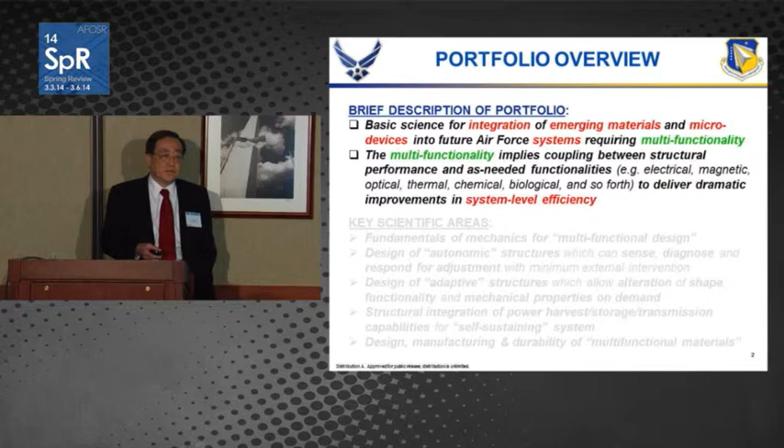The goal of the program remains the same: we are trying to promote basic research for integration of emerging materials and micro devices into future Air Force systems requiring multifunctionality. Here I'm using narrow definitions of multifunctionality coined by the system community, starting with battery structure combinations for UAVs, load-bearing antennas for aircraft, and reconfigurable space mirrors.

So they are rather narrow, and this narrow definition of multifunctionality implies coupling between structural performance and as-needed functionality to deliver dramatic improvement in system efficiency. This as-needed functionality can be electrical, magnetic, optical, thermal, chemical, biological. It's anything basically dictated by system design requirements.

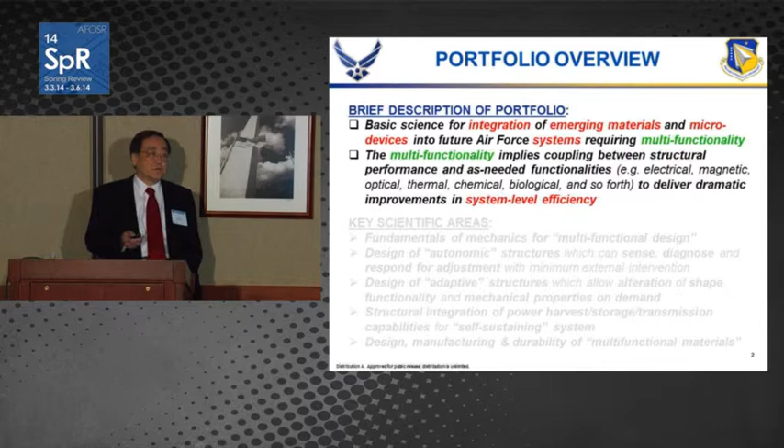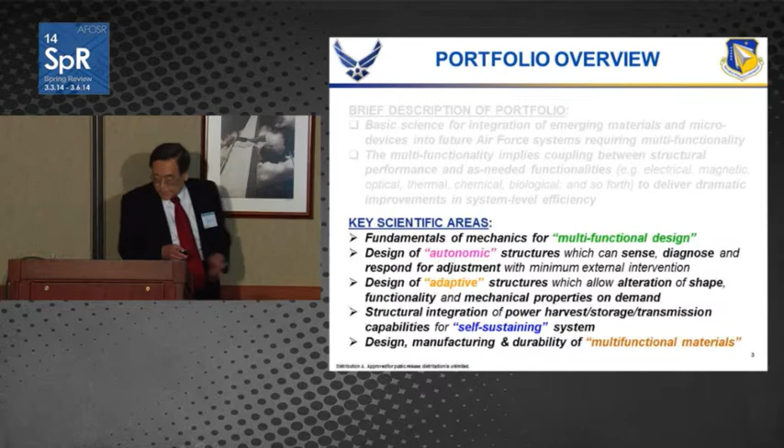And with these narrow definitions of multifunctionality, we have to deal with a really diverse range of topics. At the same time, we have to come up with a visionary context which can be used as a focus of the program. So that's how we handled it. Among several visionary contexts, we tried these three areas. These three areas are basically the main focus areas.

Autonomic systems which can sense, diagnose, and respond for adjustment with minimum external intervention. Then adaptive structures which allow alteration of shape, functionality, and mechanical properties on demand. On demand, that's very important. And finally, structural integration of power harvesting, storage, and transmission capability for self-sustaining systems.

So in fact, these three areas are somewhat overlapping. Some adaptive structures can have an autonomic feature, and in both areas many of them require power constantly, so it has to be a self-sustaining system.

Now, aside from these focus areas, we also have to handle fundamentals of mechanics for multifunctional design. In other words, we cannot rely on traditional mechanics any longer. It has got to be combinations of continuum mechanics with electromagnetic wave theory, and even molecular dynamics.

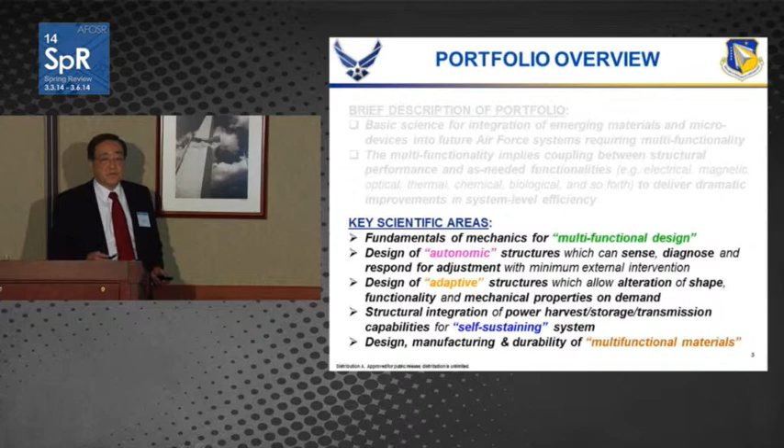And finally, when I started this whole venture about 12 years ago, there were not many multifunctional structures available. But in a 12-year time frame, a lot of multifunctional structures were established. So now we are starting to worry about manufacturing and durability problems, and also design interfaces, because the new features we're adding to multifunctional structures shouldn't become defects.

Before moving on, let me quickly point out some key facts about autonomic and adaptive structures. The autonomic system concept came from biology. Our biological systems have wonderful unique functions as a result of millions of years of evolution. The best example is our brain, our nerve system, but we are also interested in self-generating as well as self-regulating functions, because temperature maintenance and prevention of incipient damage is very, very important.

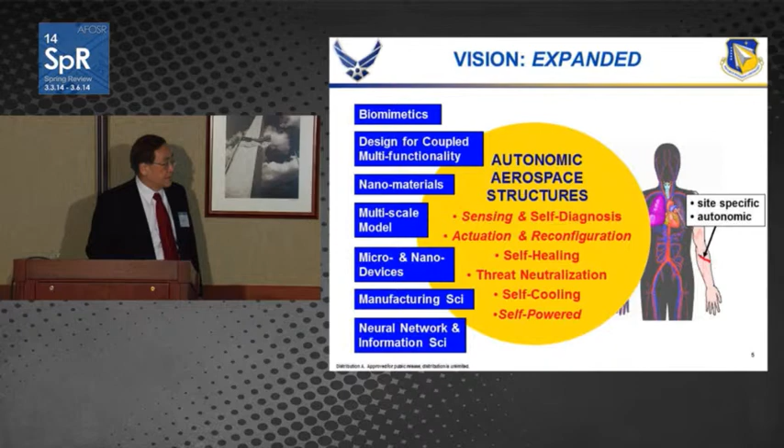Since 2002, this has been the main mission of this portfolio. We have been trying to come up with a multifunctional design of autonomic aerospace structures with bio-inspired functions: sensing, self-diagnosis, actuation and reconfiguration, self-healing, threat neutralization, self-cooling and thermal management, and finally self-powered system aspects. We made a lot of progress and breakthroughs, except threat neutralization. I still have to work on it.

And adaptive structures. Adaptive structures have a more engineering-side origin. The most well-known example is, of course, the morphing wing aircraft. You probably heard of it. In 2005, DARPA succeeded in creating it, and this morphing wing aircraft passed the flight test. But this was not a sudden development. It was preceded by smart wing structures.

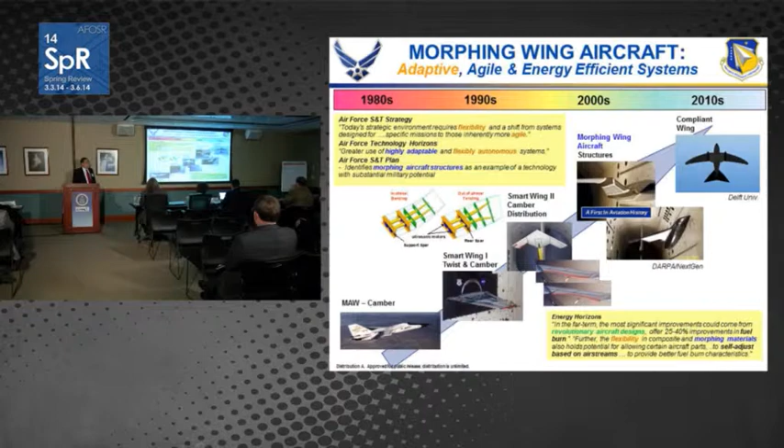In the 80s and 90s, the aircraft industry tried to twist and camber the wings using piezoelectric actuators. But in DARPA's first morphing wing aircraft, they gave up using smart materials, because the requirements were so stringent. After that, there has been a lot of activity in flapping wing UAVs, and you can see a lot of activity going on in industry as well as universities.

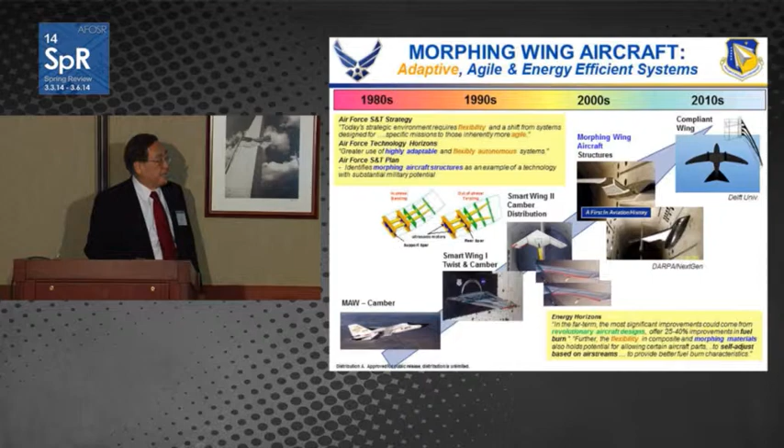And recently, initially it was just the insect and the bat wing inspired system, but now they are moving into the bird wing area. So one thing I have to really stress is they are constantly trying to invoke similarity between morphing wing aircraft and the birds and insects and bats, but actually that's just similarity. In reality, this biological system is much, much more sophisticated than the approach we are taking.

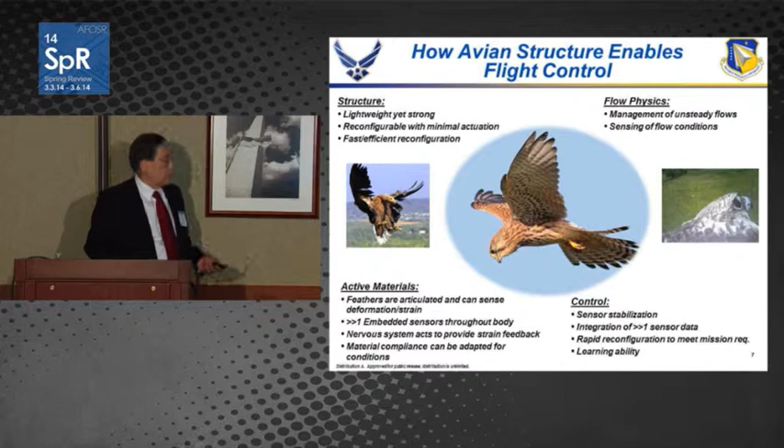In other words, I just borrowed this slide from my colleague who is working in the London office. Dr. Greg Abate provided this slide, and he pointed out that a bird's body is made of active material. In other words, feathers are articulated and can sense deformation and strain, and also millions of embedded sensors are throughout the body. And then also the nerve system provides strain feedback. And finally, compliance can be controlled and adapted to the condition. So we have a lot of work to do. So this is actually the challenge we have.

So now in tackling these various requirements from the multifunctional design point of view, I was very lucky to have a series of MURI or MURI-like programs in 3 years in a row, handling self-healing materials, structure integrated energy harvesting, and then load-bearing antenna. Of course, the old programs are concluded. Now some of them are continuing in the form of a single PI grant or STTR, but this definitely laid out the foundations of this program. But also, all these ideas come from our meager investment of single core grants. Usually, this is really the heart of the program.

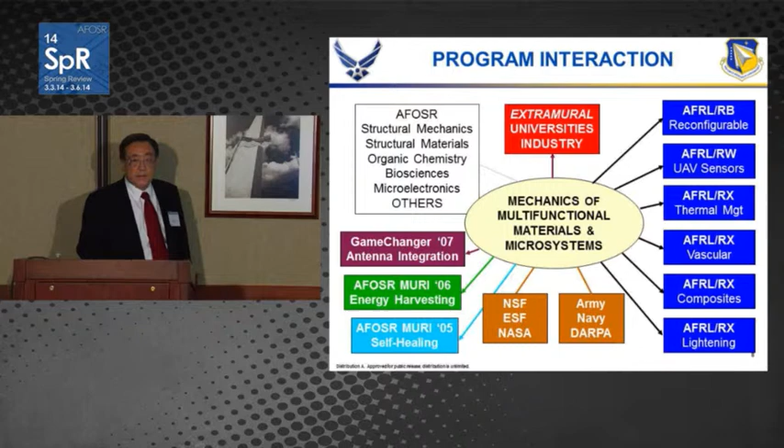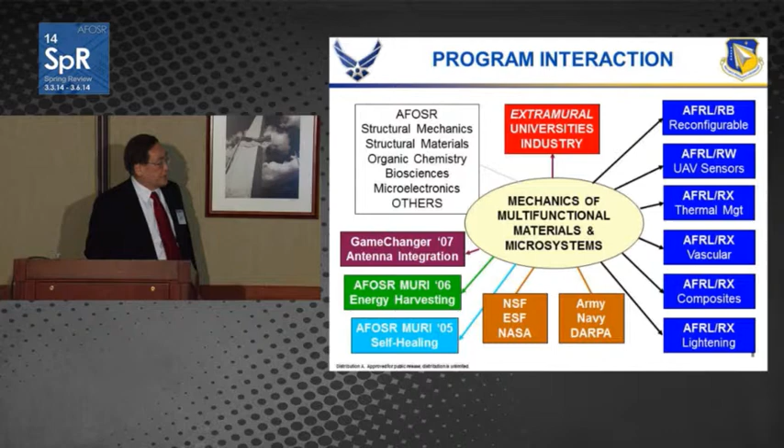And then also, I was helped by lab tasks, in other words, PIs of lab tasks. Actually, I don't have many lab tasks. I have very few. The reason is, I basically regard them as a brain trust, in fact, corporate memory, rather than just doing research. So with their help, I could formulate all these programs. And then also I collaborated with colleagues in AFOSR, as well as our sister agencies, the National Science Foundation, the European Science Foundation, and NASA.

And then these 3 programs were followed by various initiatives. Especially most important is a MURI program in 2009 on neurological system-inspired sensory networks. In 2012, I could set up a Center of Excellence, jointly funded by AFOSR and the Munitions Directorate, on high-rate physics. Apparently, this is not truly my core area, but somehow John Fuller remembered my research work done at Penn State before coming to AFOSR, so I was drafted. Now this center was moved to Dr. Jennifer Jordan's portfolio in dynamic materials and systems.

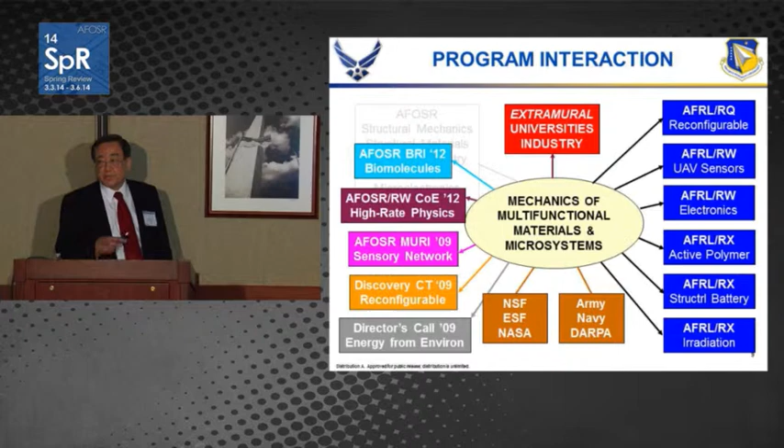And then in 2012, we also had this BRI program. I collaborated with Hugh DeLong. We actually created 2 mini MURI-like programs. One of them belonged to Hugh's portfolio, emphasizing bioscience. Mine is emphasizing the transducer materials area, the use of biomolecular material as a transducer material.

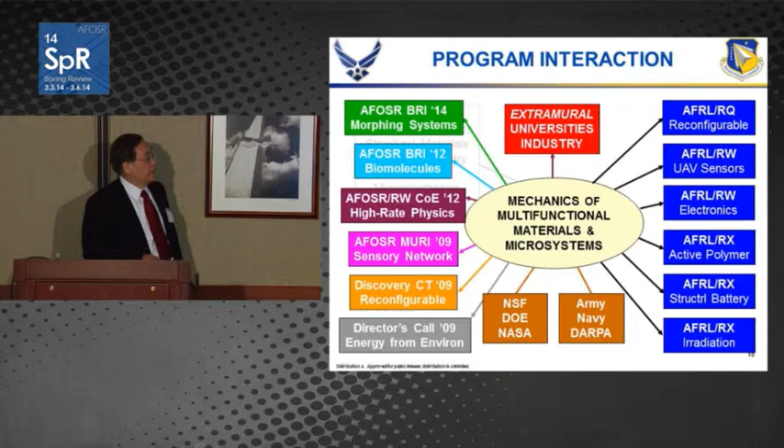And then finally, this year, I'm delighted to have this basic research initiative on morphing systems. In fact, this is the result of a collaboration between me and 4 program managers, especially Doug Smith in the fluid mechanics area, and then Pat Bradshaw in the sensory information systems area. And then also I had great help from Greg Abate in the bio-inspired flight area.

So, funding trend. I'm going to maintain the current pace of funding in the first 2 areas, fundamental mechanics and design of autonomic structures. And then adaptive structures, and manufacturing and durability, I would like to increase the funding because these are probably more urgent. And then also eventually we may have to shift the central focus of this portfolio from the autonomic to the adaptive side. This is probably a more complex problem, and is really very attractive to me.

But to make room, I may have to reduce funding in this energy area. Part of the reason is that DOE and ARPA-E have now started to invest in multifunctional structures with structurally integrated energy harvesting and storage capability. So basically, I can yield this area.

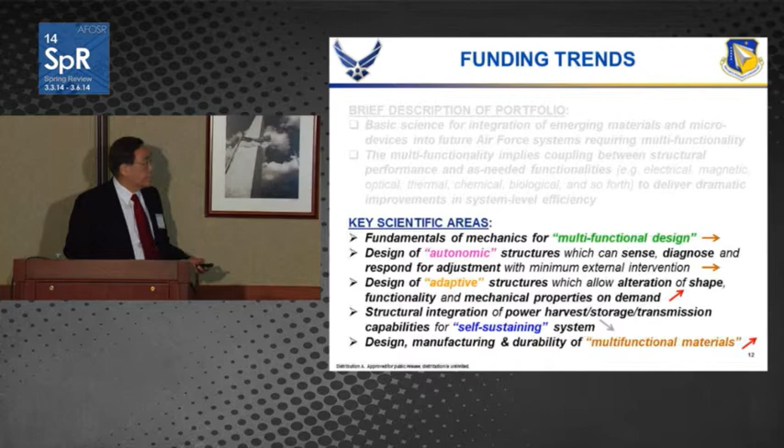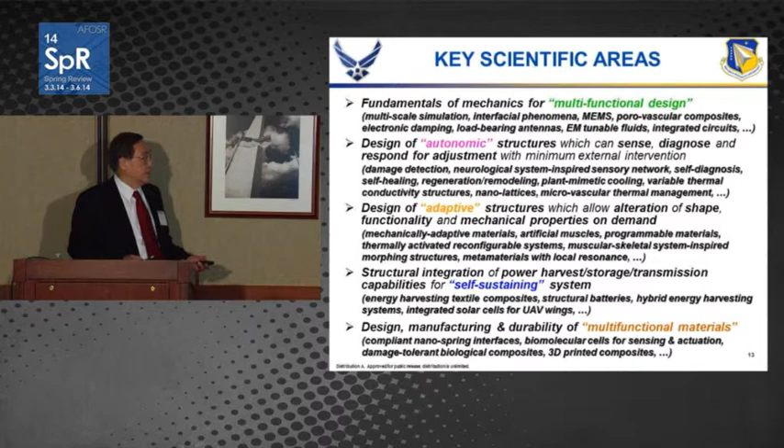Now, I'm going to skip this because of the limitations of time, but there are a lot of interesting sub-areas we had to define. In fact, each of these small words, I'm not asking you to read this, but these are all really breakthrough areas, especially the last one, 3D printed composites. They are even now moving into 4D, 4-dimensional, by using shape memory material, but I'm not going to include that in today's presentation. And then I'll just skip this transformation opportunity.

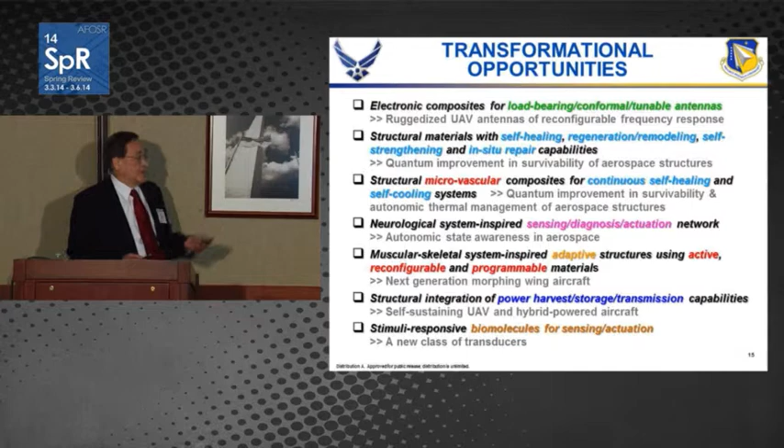I'm sure you can imagine what kind of transformation opportunity all these areas hold just by reading the title of each area. And in this one, of course, we are not the only one. The Air Force is one of the DoD agencies, although we are the lead in this area. But other agencies are interested, so we are actually holding a workshop, with a tentative title like this, the second multifunctional.

So every other year we are holding it in conjunction with my program review. In 2012, I held the second multifunctional materials for defense workshop, in collaboration with my counterparts at ARO and ONR, and representatives of various Air Force Research Lab directorates, two directorates of Army Research Lab, weapons and materials and sensors, and the Naval Research Lab.

So we held this workshop, and we intend to hold the third one this summer in conjunction with my program review. Also, I had a very close relationship with NSF. In fact, this whole sensing initiative was actually influenced by an initiative proposed by NSF people. And then after he retired,

now I'm trying to organize a collaborative relationship with my direct counterpart, the program director in mechanics of materials, Marty Dunn, who used to be a PI of my program. But as soon as he got to NSF, he moved to Singapore to become vice president of research. They're trying to set up the MIT equivalent in Singapore. So now I'm talking to his successor, Tom Siegmund, who is also one of my PIs.

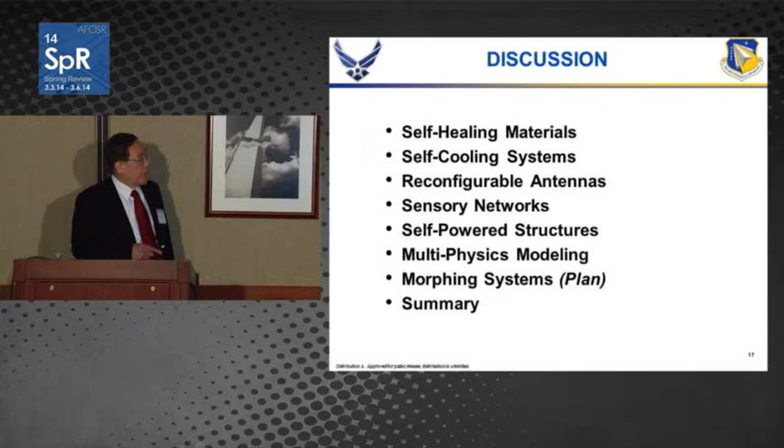First, self-healing materials. In fact, the self-healing materials area brought fame to AFOSR. We were the first to invest in this area when DARPA and NSF declined the proposal. I have to give credit to my two predecessors, Professor Ozden Ochoa, now back at Texas A&M, and Professor Tom Hahn at UCLA, who decided to fund this program. Initially, the capsule-based self-healing concept was a sensational development: tiny capsules containing healing agent are put in the polymer matrix, and when a crack comes, the capsule opens, reacts with the catalyst and heals the local region.

But unfortunately, when I took over this portfolio, the capsule size was about 200 to 300 microns. So you can put it between the plies, but not between the 10 micron diameter fibers typically used in aerospace composite systems. So I continued to support it as a single PI grant, and last year we finally concluded, now moving into the next stage of damage tolerance. Here, as you can see, this 10 micron diameter carbon fiber is now populated with nanometer scale capsules containing healing agent. This is a truly remarkable engineering feat.

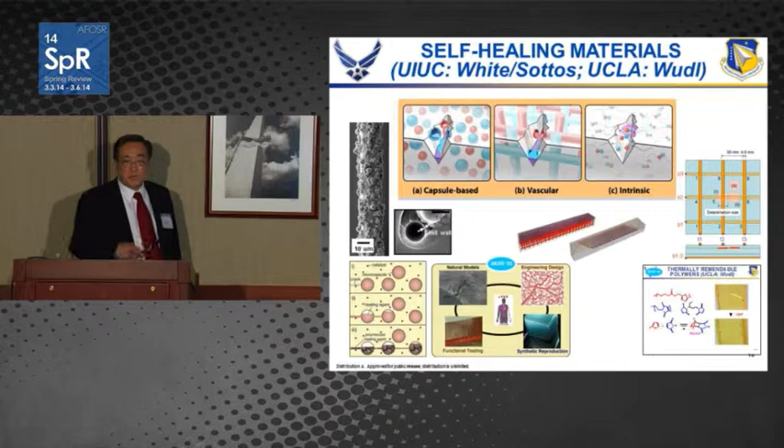Because of that, we organized a MURI program in 2005. I collaborated with Hugh DeLong on this, and as a result they developed a series of vascular systems, trying to emulate the vascular system present in biological systems. Initially it was a very simple network, then more and more complex forms, even complex shapes. But one of the biggest issues is how you put this in structural grade material, how you make this network survive structural loading.

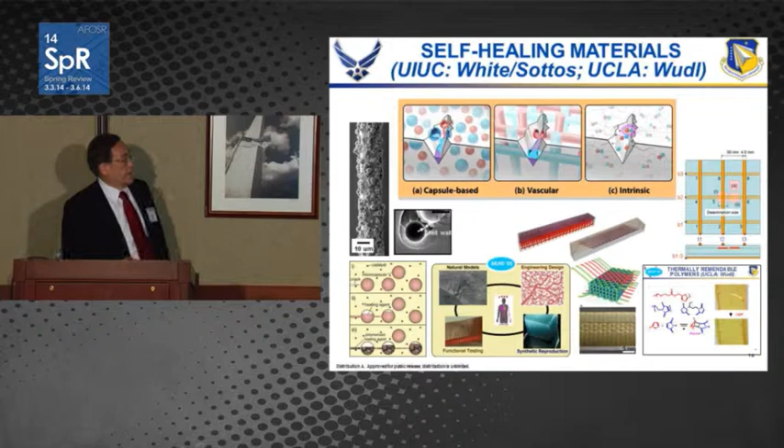And there is a solution they came up with. They put sacrificial fiber intertwined with the fiber composite structure, and the sacrificial fiber can be evaporated. We are utilizing this polylactide fiber created for recycling purposes, creating a helical path inside the structural composite. We don't show the analytical aspect here, but we found both analytically and experimentally that this helical path actually helps in pumping fluid through the path. And finally, we also sponsor work in molecular level healing: a polymer system with reversible crosslinks.

So when you use this polymer as a composite matrix, then it's just moderate heating. I'm not talking melting. It's basically just very moderate heating, then basically this crack disappears. So this is another approach. So you could put in this heating patch, or you can use this material as a matrix for composite, the carbon fiber composite. And then carbon fiber composite typically heats up when you transmit electricity. So this can be another solution.

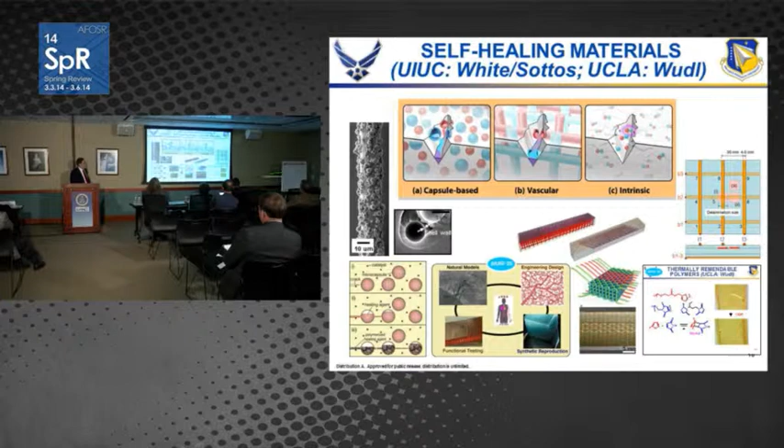So these are really whole areas I'm quite happy about. Now probably you noticed that this self-healing is basically, we took a cue from skin healing, because we are dealing with incipient damage, very tiny damage we are worrying about. And then if you look at this diagram, there are of course like microvascular type supply of this basic healing agent, but look at this scab. There is a relatively large scab formed, and then basically providing maneuvering room.

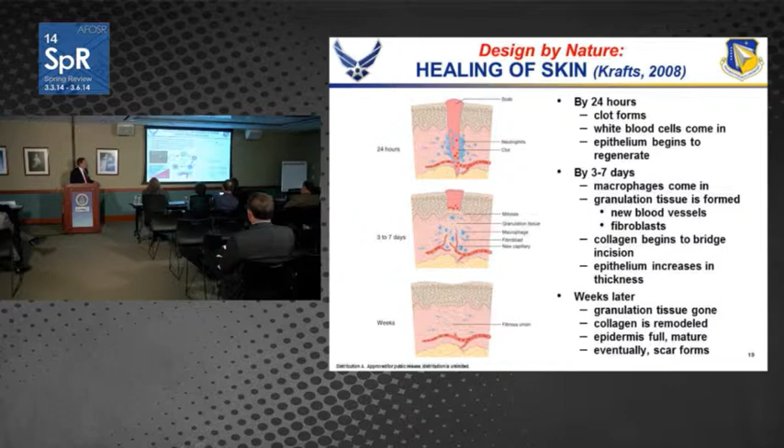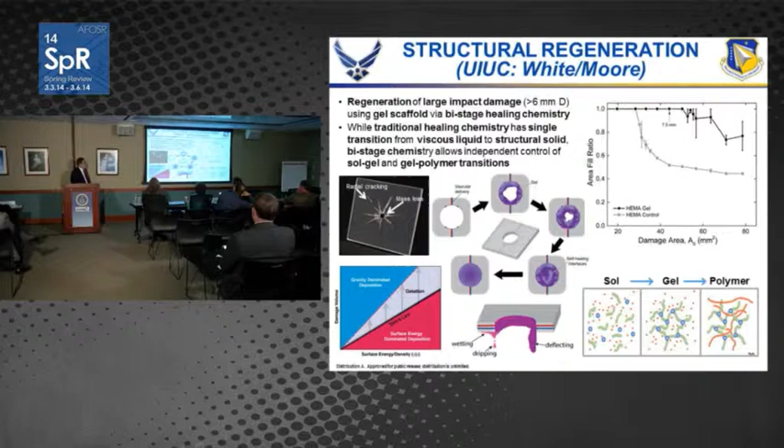You may wonder, couldn't we basically simulate this? Yes, we could. In fact, this particular example, this impact damage, almost as large as a 1/4 inch diameter, like a bullet hole. They came up with the solution of forming scab-like material. In other words, normally the healing reaction is from liquid to solid, a very instantaneous reaction to ensure self-healing. But here they created new healing chemistry. So basically they first form the gel and then solidify. So because of the gel type reaction, you could fill out this hole as large as a 1/4 inch diameter hole.

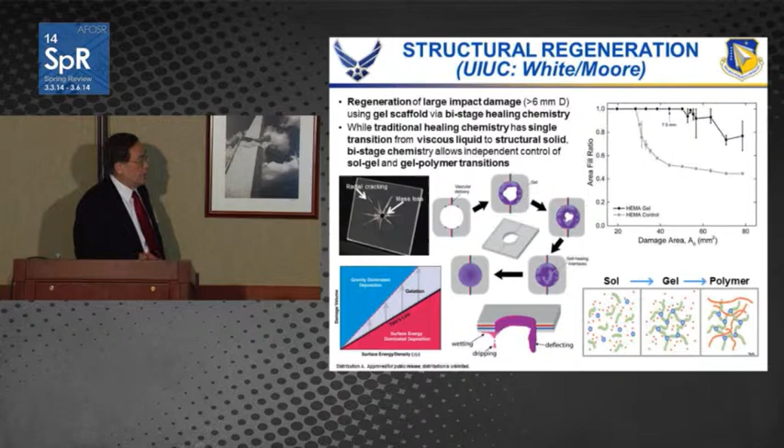So in this self-healing area, I think we basically resolved most of the issues. I think the remaining issue is probably now we have to really render this whole area to the 6.2 area so that they can utilize the results we generated. So now we are shifting to a more tough problem, more structural side.

So in 2012, we held a US-Europe workshop in Venice, and the reason was Max Planck Institute in Germany is actually ahead in this bone remodeling area. So we held a workshop. So as a result, I drafted a MURI topic this year. Part of the reason is not only their work, also I spotted one YIP grant, young investigator from University of Texas, Dallas. He actually had initial results showing that piezoelectric phenomena is partly responsible for this bone remodeling. Bone actually under stress becomes stronger. So he actually showed some of the results. So we are definitely trying to combine those new inputs.

Now, the self-healing materials area I've been talking about, I didn't show the detail, but it requires pumping. In other words, pumping means basically you need power. So that's how I got involved in self-sustaining structure. But on the plant side, an entirely different vascular system was developed. Can you imagine transporting water in a tall redwood tree all the way to the top instantaneously? That's a remarkable feat, and they are doing it strictly by passive means. There is no pumping or anything. How do they do it? They are using a thermodynamic trick.

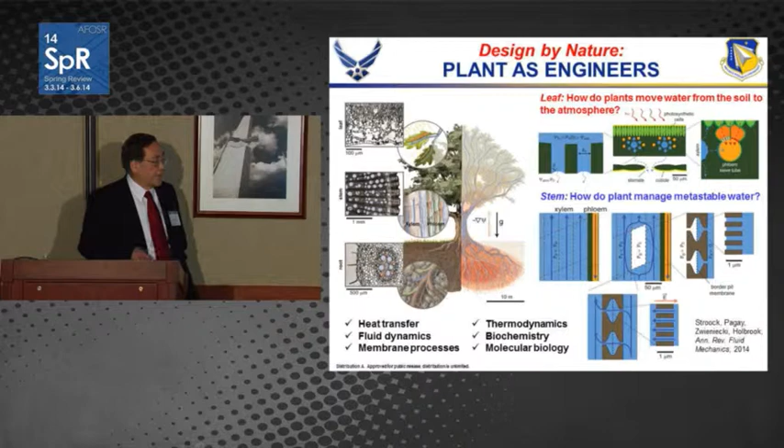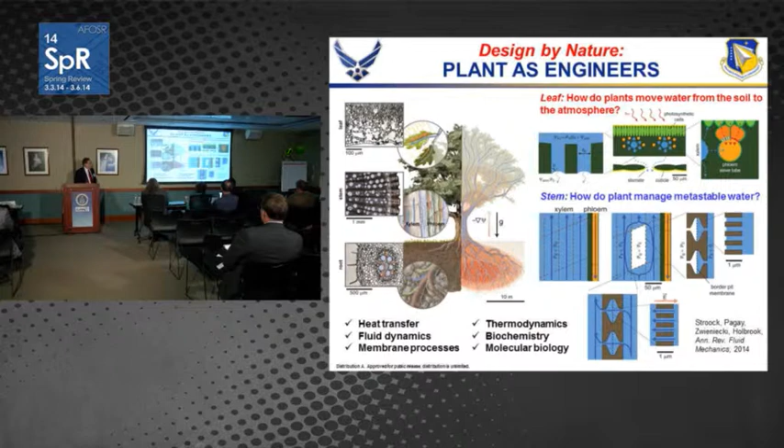In fact, I remember some papers, by measuring acoustic emission, could accurately define the rate of evapotranspiration. So this remarkable feature, I actually funded this program. In fact, it's a little bit at the edge of my program, but I funded the program for the team organized by Professor Abe Stroock at Cornell on the engineering side, and Professor Michele Holbrook at Harvard on the plant science side. So it's a little bit more chemical engineering, but anyway, I funded it. Then last year I renewed it to move all these plant physiological results to the development of a device area.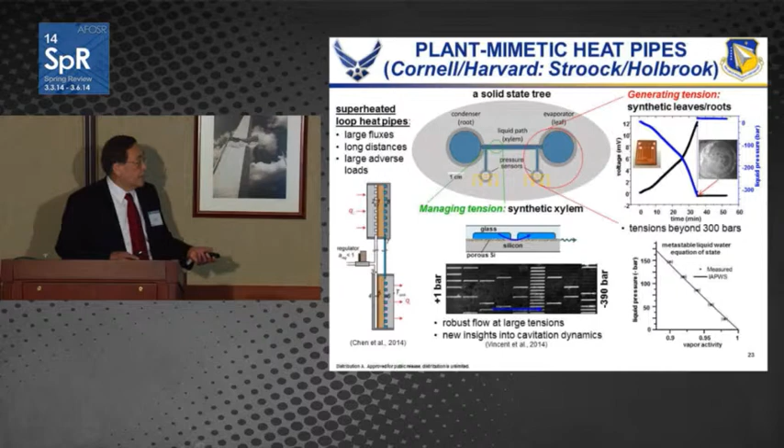When I gave this grant to Texas A&M, the PI was Dimitri Lagoudas. He spent his sabbatical at the University of Illinois with Scott White, and he got the idea. So he decided to use a vascular system for the antenna area, and then eventually he moved out, and the young faculty took over. Now the program has expanded and renewed. So now we have 3 universities involved. And here is what they did.

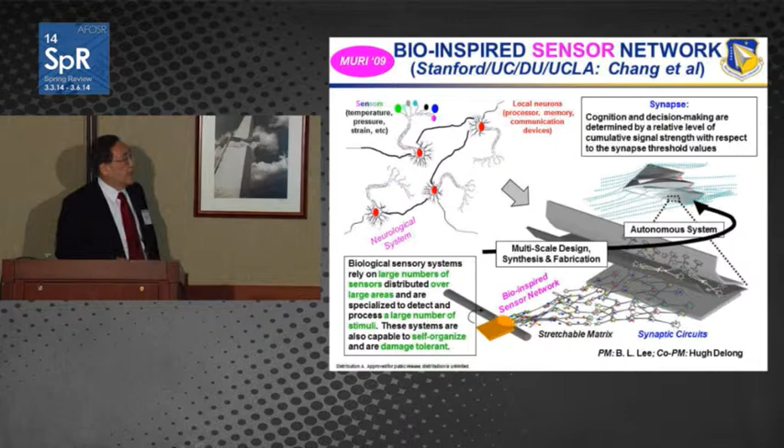But a really interesting feature is the synapse. When information is transmitted from one neuron to another, it relies on a combination of the digital pulse and the analog case of a neurotransmitter chemical. So when the so-called presynaptic signal arrives, it triggers the electrochemical reaction in the synapse, and in turn it creates the so-called postsynaptic current.

So basically, the cumulative signal is filtered through the preset synaptic value. Then once it reaches that, the postsynaptic current is transmitted to the next one. So basically, it's a filtering mechanism.

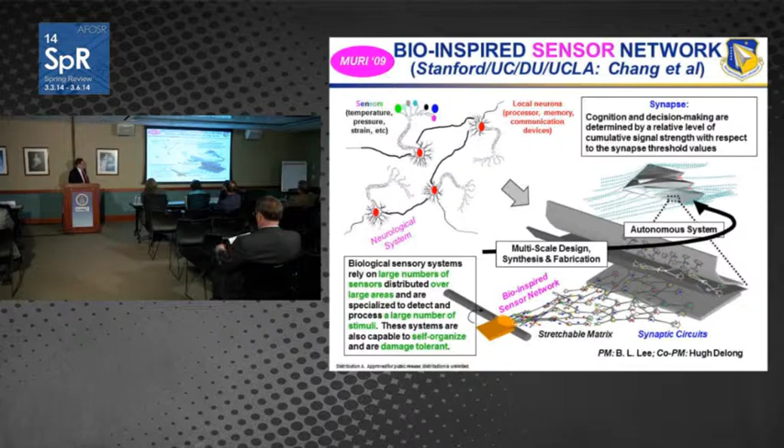In this MURI, there are many achievements, but the two most important are, first, we could create this network of sensors, all interconnected, by connecting piezoelectric transducers by microwire in a stretchable matrix. As you can see, this tiny scale can be stretched this large, 1,000%. Initially, we worried about possible defects, but it worked very well. So now we can put not only piezoelectric but also temperature transducer sensors. So we succeeded in creating a bio-inspired sensor network.

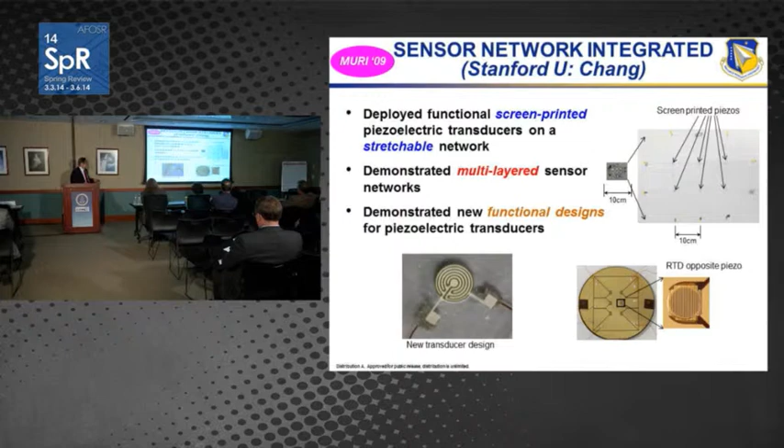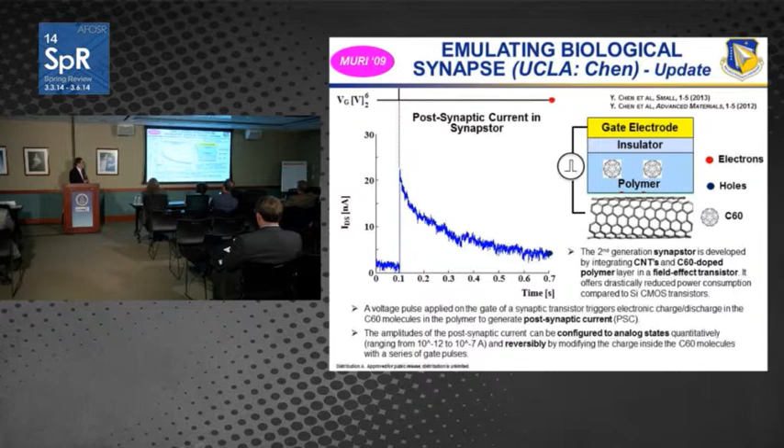But more important, we also succeeded in creating a synthetic synapse. I mentioned that when the pulse is delivered, it creates postsynaptic current. That's exactly what happened. Professor Chen at UCLA laid carbon nanotubes on the silicon chip as a channel, and then he put this polymer. It's a fullerene...

You know, last time I had the same problem. Fullerene. It's okay, we are not chemists.

So, I'm simply saying this fullerene-rich polymer was added, and the insulators, and then titanium-gold as an electrode. So when a positive pulse was applied, fullerene in this polymer layer is activated and attracted to the carbon nanotube, creating a rather electron-rich situation. So that's the pulse creating postsynaptic current.

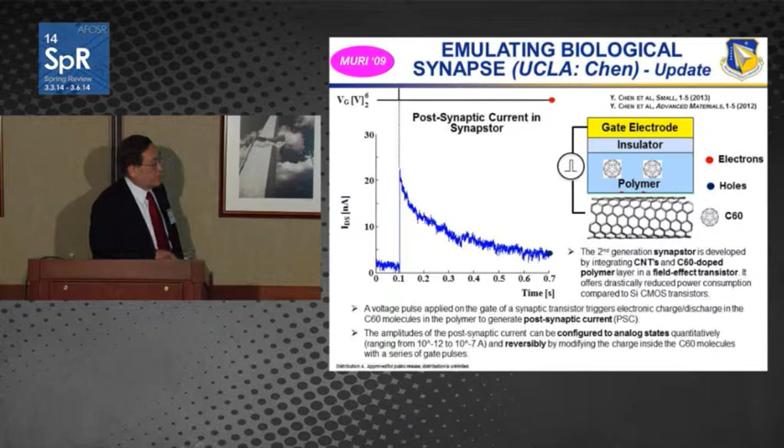So basically, using synthetic material, we are creating electrochemical reactions and current, exactly the synaptic function. So at least the first step of synaptic function we could emulate, and now they are working on creating neuromorphic circuits. In fact, I almost put that slide, but I deleted it because it would take more time. But they were successful.

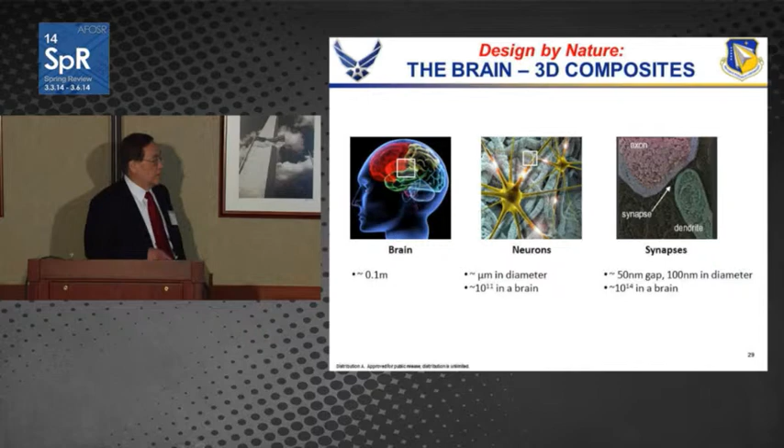Their biggest problem is power, energy. Silicon-based devices consume lots of energy, and the brain never has such a problem. So this is really another obstacle we have to overcome.

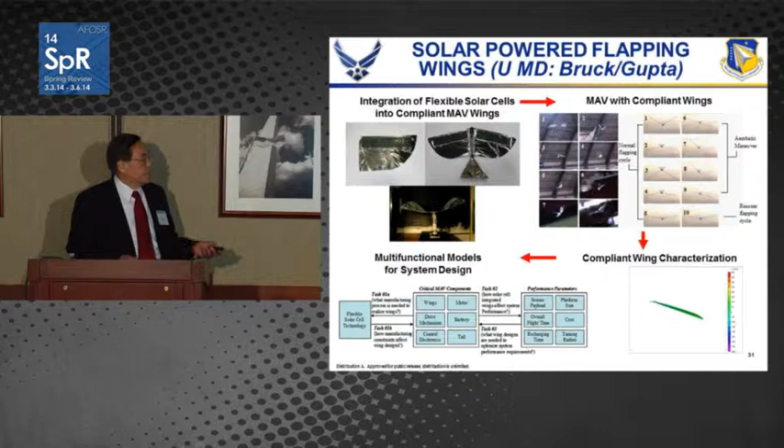So it's quite encouraging results. And in all this work, we are showing mostly successful integration of solar cells or batteries, but there is some problem. The material tends to degrade during processing, but that we can overcome. The big problem is the thermal mismatch between the device and the substrate. As a result, you have complex failure patterns, and especially the interfacial area is a big problem. So definitely we need a compliant, strong interface.

So once again, one of my PIs at the University of Illinois, Professor Chasiotis, came up with a copper or silicon nanospring.

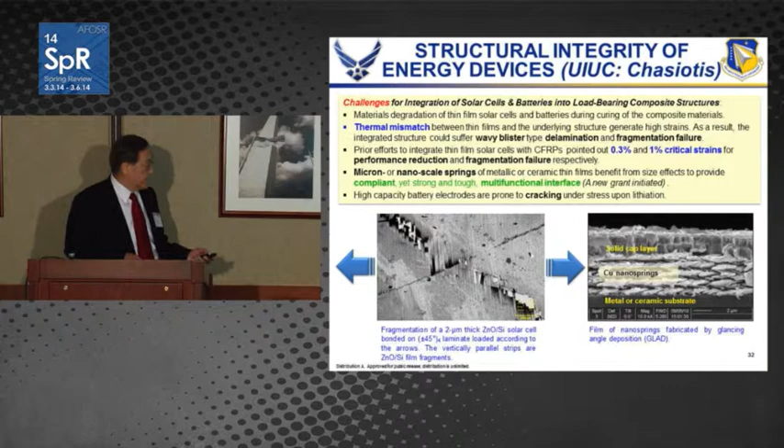And placed between these two substrates and then embedded the device. And initial results are quite encouraging. And then finally, I don't have time to talk about that, but all these examples I cited, you probably already sense that these combinations of mechanical and electromagnetic function are creating sort of a multi-physics type situation. So we really need a model.

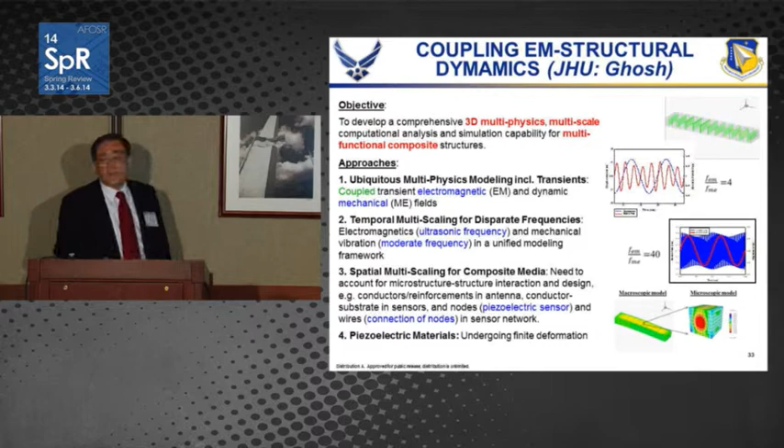And I noticed that in many of our modeling efforts in the past, a lot of work was done in the metal plasticity area, but not much in this functional electromagnetic property area. So Professor Ghosh, who used to be at Ohio State, came up with a solution. He handled this multiphysics modeling on a temporal as well as a spatial basis. In the temporal case, they could handle combinations of electromagnetic signal at ultrasonic frequency with mechanical vibration at moderate frequency, in a unified modeling framework using wavelet transformations. In the spatial case, he could handle it using the so-called asymptotic homogenization technique.

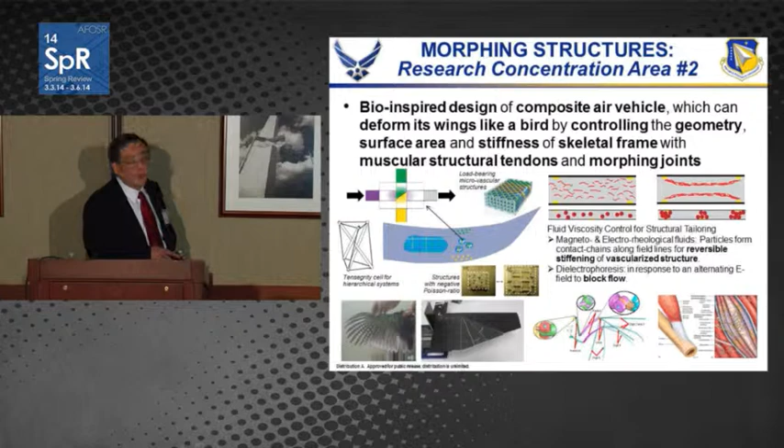So I think I'm done except this basic research initiative. Basic research initiative on morphing structures, we are specifying 6 areas, and 3 areas let me just quickly scan through. We are trying to come up with a bio-inspired design of composite air vehicles, which can deform just like a bird wing by controlling geometry, surface area, stiffness of a skeletal frame with the muscular structure, and especially the morphing joints. So there are a lot of ideas actually tossed.

And then there is active material. In fact, in our previous initiative, we came up with a lot of interesting active materials, like the first ever reversible shape memory polymer, artificial muscle based on carbon nanotubes, and this self-oscillating gel, which we are currently working on to make a structural grade material, and some of the proprietary systems offered by industry. So we are trying to transform these various inputs into an assembly that basically can modulate mechanical properties in a reversible manner.

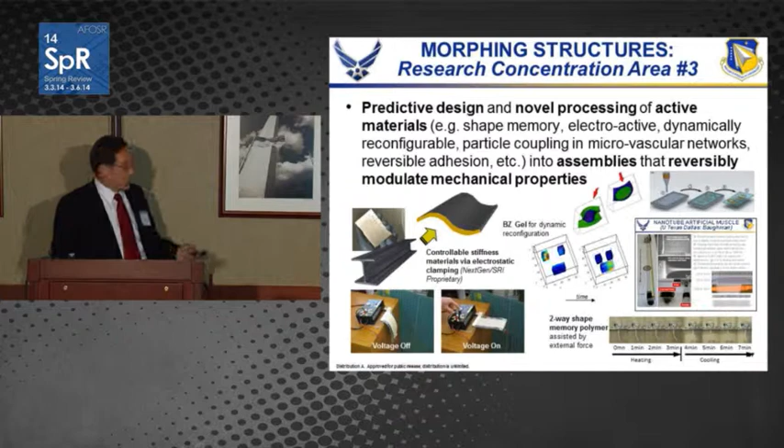And then finally, we are trying to integrate this active material with the so-called computational metamaterial. This is a relatively new concept, basically computer as a material and material as a computer, so that we can have this periodic material which can sense and actuate based on programmable logic. So these are the main points about this initiative. Of course, the other three sub-areas are Doug Smith's area, fluid mechanics, and bio-inspired flight.

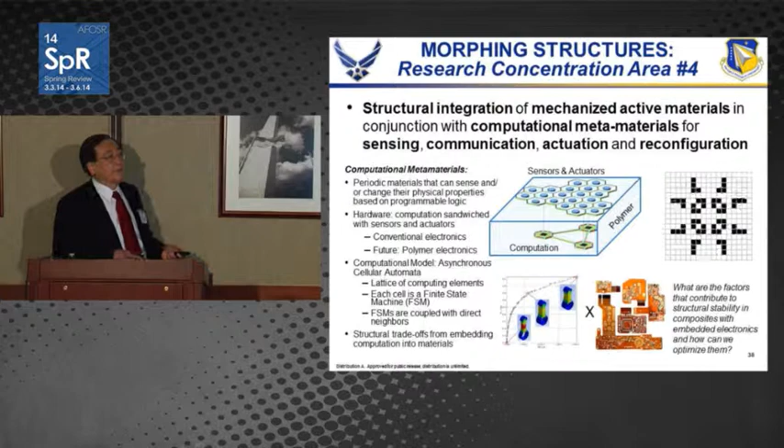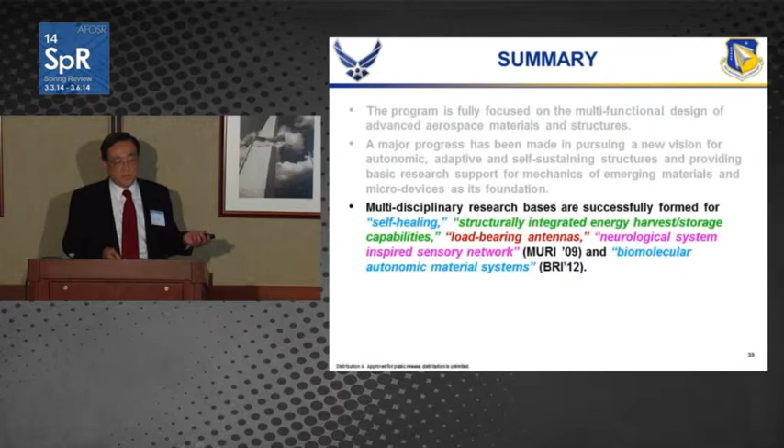So with this, I can safely say that the program is fully focused on multifunctional design of advanced aerospace materials and structures. Major progress has been made in pursuing this vision I presented. We have an excellent multidisciplinary research base as a result of our past MURIs and BRIs. And this year, we are lucky to have this new initiative in morphing structures.

And also, maybe I'm greedy, but I'm planning 2 more initiatives, one MURI for structural regeneration and remodeling. In fact, I almost titled this regeneration and remodeling as immortal material, because you can make a material immortal, constantly replenishing. But it's just too flashy, so I gave up. And then next year, hopefully, this mechanical metamaterial for structural damping. In fact, the damping area, I feel we have been neglecting for so many years, so we definitely need to invest in this area.

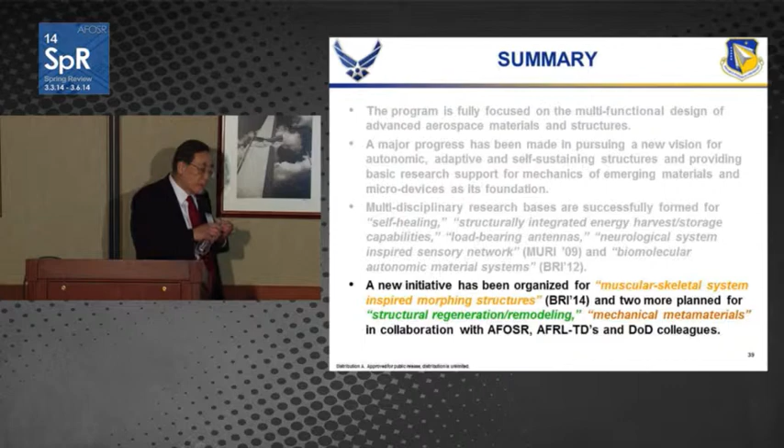Any questions? Yes. So this is very interesting, the work on the skeletal and the neural. But I didn't see that you have a model. You need a model that couples both. I mean, you have the skeletal, the muscular, and the neural. So you need, I mean, this is sort of a feedback loop there. Absolutely. Yeah, absolutely, we need a model, yes.

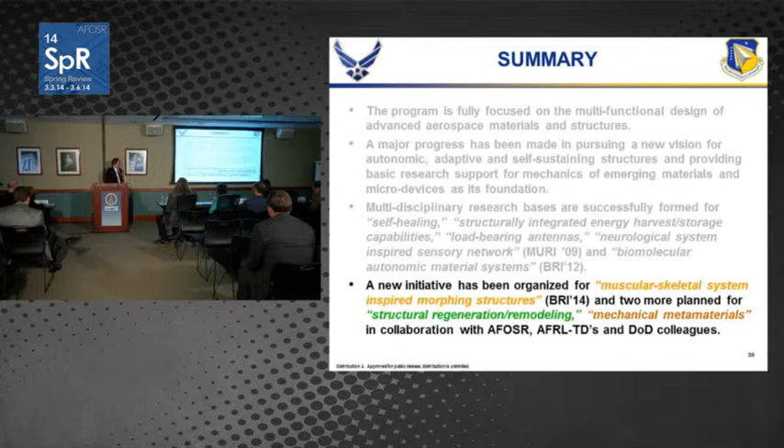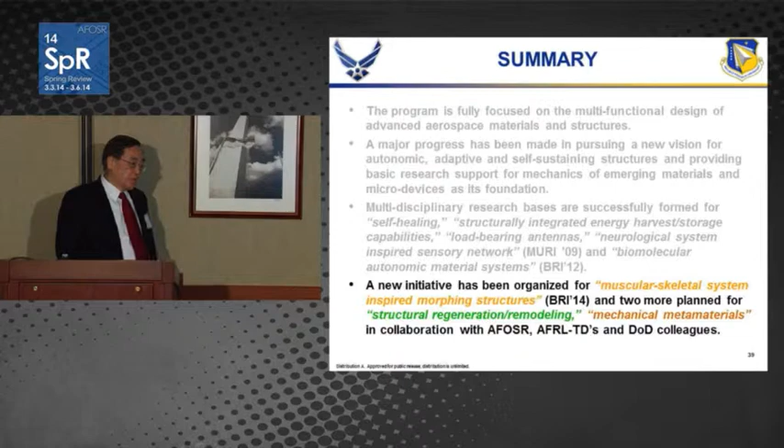You know, the trouble is, whenever I prepare the slides, I always end up neglecting this modeling side, because I cannot put the equations in. But yes, as part of our team, we are definitely looking at it. In fact, especially when you try to come up with a bio-inspired design, modeling is sometimes really... But in addition to modeling, this coupled modeling, the neural model, the skeletal, the muscular. Yeah. So hopefully maybe I can get help from your portfolio, yes. In fact, I noticed the name of Professor Oden, so I didn't realize your portfolio is funding that area.

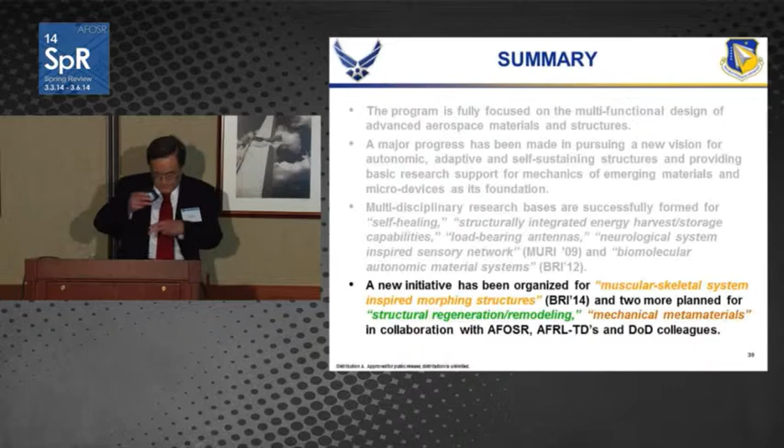See, I could have spent a little bit more time there. I can't hear you. 1 o'clock. We start at 1 o'clock. Yeah. It says here.